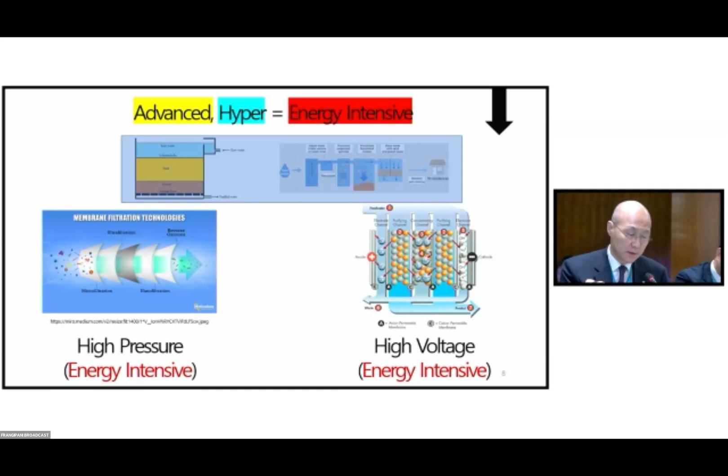I think global boiling affects water quality more than quantity. To produce safe water, energy intensive processes are being needed. In the global boiling era, research on water treatment technologies that use energy efficiently is needed to ensure safe water quality.

We water quality specialized engineers should catch two rabbits: one rabbit is safe water quality, and the other is an energy efficient water treatment process. But it is very difficult to catch the rabbits simultaneously.

However, in other countries, for example Germany, they throw one stone and catch two flies. So it's the same thinking. And one more important thing about water...

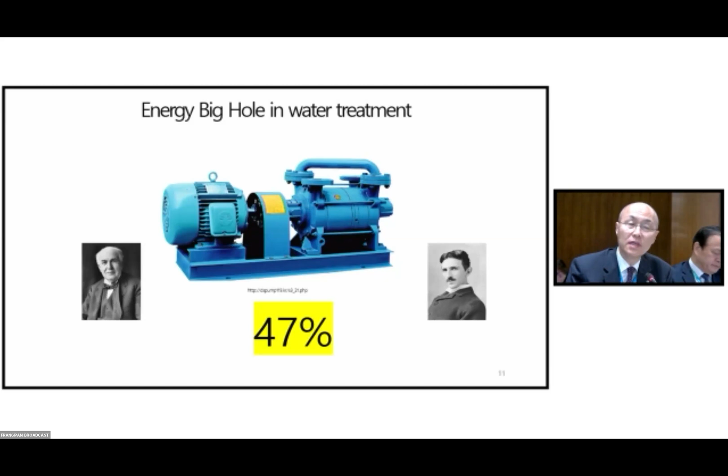This is Nikola, the developer of AC, and he is compared to Edison, who is very famous. Edison developed DC. This is KEPCO in Korea.

KEPCO is the Korean company that manipulates the electric grid, the power grid. In order to reduce global warming, energy production based on fossil fuel decreased. Various technologies of renewable energy production are being developed and used. So the usage percentage of DC increased gradually.

I think in that electricity energy area, we as water treatment specialists should consider how we utilize DC in water and wastewater treatment plants.

Seoul has 6 wastewater treatment plants and 5 water treatment plants. These plants consume 47% of the city's public sector electricity.

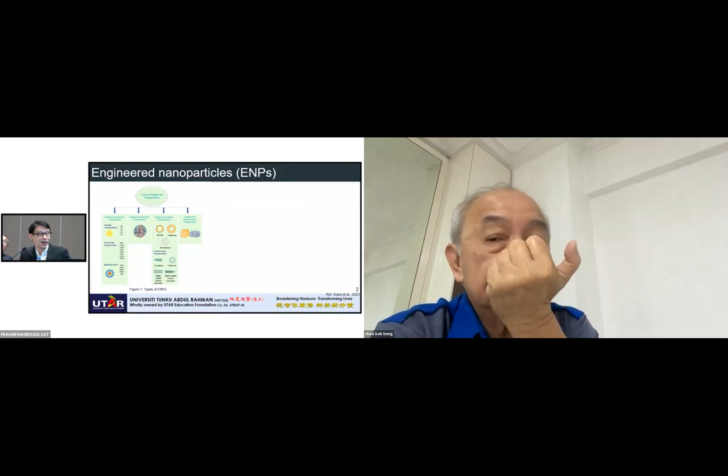I'm just going to briefly introduce a bit of these pollutants. The first one is the engineered nanoparticles.

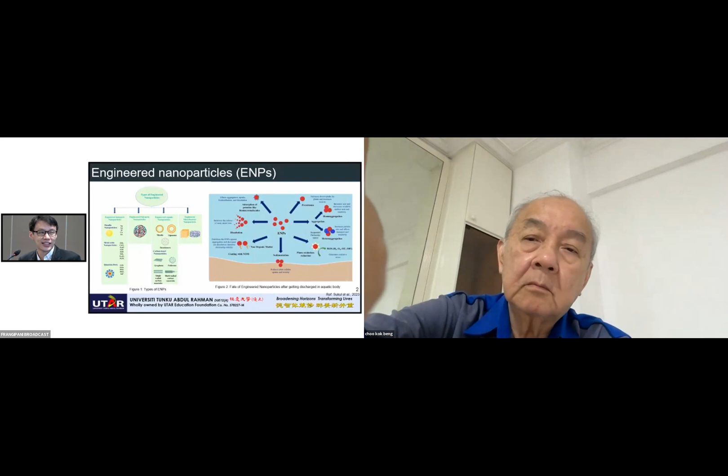As you can see, engineered nanoparticles exist in a lot of different forms. We have popular nanoparticles used nowadays, like graphenes, multi-wall and single-wall carbon nanotubes, fullerenes, and metal oxide nanoparticles. They've been used in many applications due to higher stability, higher electronic conductivity, and better mechanical properties. As time goes on, we believe more applications will use this kind of material, and if not treated properly, they're going to discharge into our water bodies as well.

This can constitute a new type of pollution that we need to be aware of. If you look at these diagrams, you can see that engineered nanoparticles, when entering our aquatic bodies, can produce a lot of different pollutants and create some hazardous issues as well.

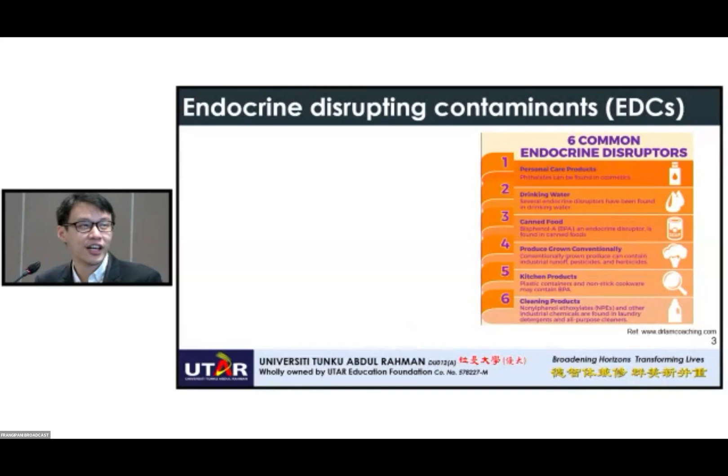The next one is what we call endocrine disrupting contaminants. Again, they can be found almost everywhere in our daily life - from personal care products, drinking water, canned food, cleaning products, etc. They have potential adverse effects even at very low concentrations, and can have delayed effects. The difficulty in detecting this kind of pollutant is that its effect might take years, or even affect multiple generations, due to its effect on body hormones and response. It can cause irreversible health damage, and lack of adequate detection method enforcement is the main issue, where we're unable to detect it properly in our wastewaters.

Then there's also what we call persistent organic pollutants. As its name says, this kind of pollutant is persistent - it can accumulate in our whole ecosystem, bringing toxicity and affecting human health and the environment. Several characteristics of POPs: they possess toxic characteristics, they're persistent in the environment meaning they can exist for a very long time without being degraded due to high stability, and they can bioaccumulate through fish and marine life that consume them, then transfer into our human food chain. Due to its high stability, it's also prone to long-range transboundary atmospheric transport - it can transport from one place to another easily, and potentially cause adverse human health and environmental effects. These are very serious issues.

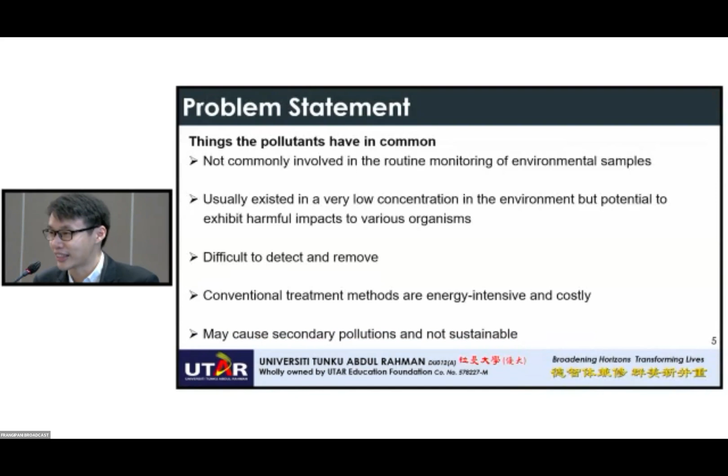But it can still cause great harm to various organisms in our ecosystem, and it's difficult to detect and even remove. Conventional treatment methods work, but they're either energy intensive or very costly. Some treatment methods like advanced oxidation might cause secondary pollution and are not sustainable in the long run. That's why we're touching on phytoremediation, a more sustainable and green technology to remove these pollutants.

Phytoremediation is basically a plant-based approach where we use the natural properties of plants to remove pollutants from contaminated environments, either soil or water. It works with many different types of pollutants, and with emerging contaminants it has been found particularly effective because they exist at low concentrations. It can also limit pollutants from spreading, using plants to hold them in place due to their resistance to wind, rain, and groundwater flows.

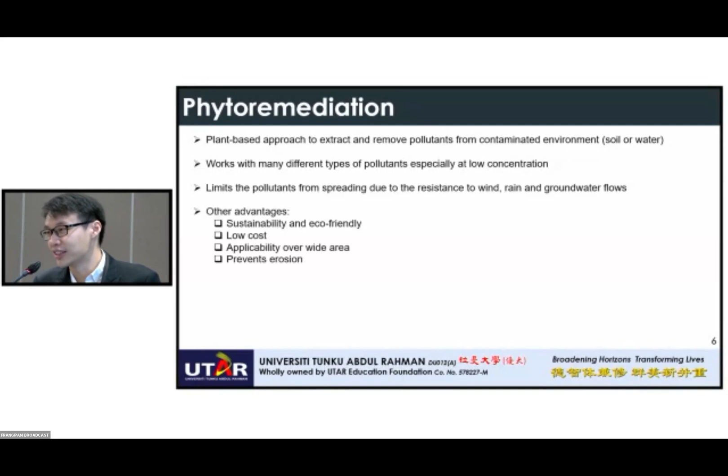It also has other advantages, such as being more sustainable and eco-friendly. It's a plant-based approach where the energy comes basically from sunlight, so it's very renewable and low cost. It can be applied over wide areas, and using plants can help prevent soil erosion and improve soil fertility.

One real example is phytoremediation being used to clean up the Aberdeen Proving Ground in Maryland, USA. This ground was previously used for burning industrial and warfare chemicals from the 1940s to 1970s. But through planting poplar trees at the phytoremediation site, contaminants were reduced by up to 85% without any additional cost.

Just by planting all these plants there, it can help remove the contaminants already, proving again that it's effective over a wide range of areas.

There are different kinds of phytoremediation we need to discuss. First is phytoextraction, where we uptake and recover pollutants into the aerial parts of the plant biomass, meaning the upper part. Then we have phytostabilization, where we immobilize pollutants in soil or water through absorption in plant tissue, mostly at the lower parts of the plant.

Then we have phytodegradation, where certain enzymes from the plant help degrade organic pollutants into non-toxic components. Then phytovolatilization, where we convert pollutants or heavy metals into volatile states where they become less toxic. And then we have phytostimulation.

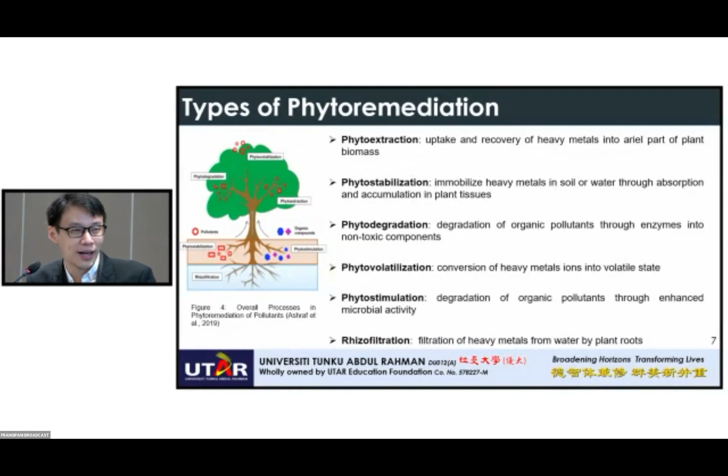On its mechanism, phytoremediation involves a series of processes to accumulate pollutants inside the plant: pollutant mobilization, root uptake, xylem loading, root-to-shoot transport, cellular compartmentalization, and sequestration. First, pollutants are absorbed through the root surface of the plant and moved up into the plant itself.

Upon entering the root cells, pollutants can form complexes and be immobilized in the extracellular or intracellular space of the plant. The metal ions or pollutants are then sequestered inside the vacuoles of the plant cells and transported into different parts of the plant through the xylem streams. Subsequently, they are transported and distributed to the leaves or other parts of the plant, where they can be easily sequestered in the extracellular compartments.

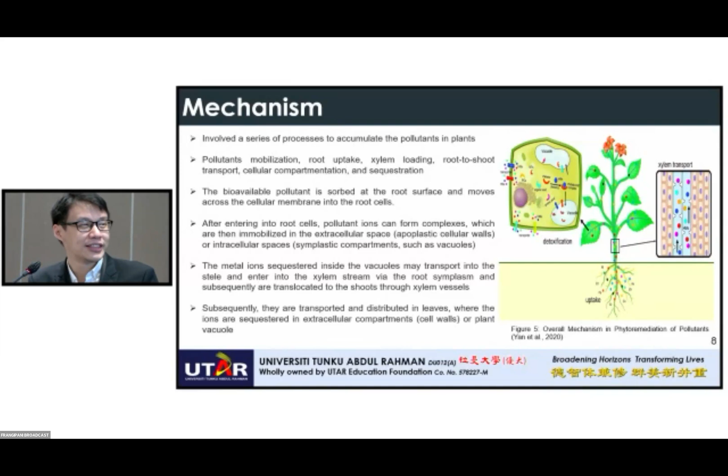So these are the main mechanisms that are happening in phytoremediation. On the current status, phytoremediation has been ongoing research for decades, and currently we have a lot of different countries actively contributing to this field. Publications regarding phytoremediation have been increasing through the years.

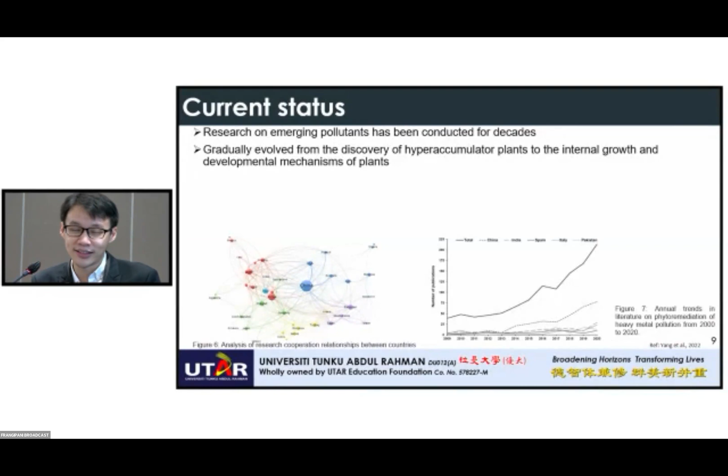We have gradually evolved from the discovery of hyperaccumulator plants, which means plants that can accumulate pollutants very fast and in large amounts, that's why they're called hyperaccumulator plants. From this discovery, we now focus more on the internal growth and development mechanisms to understand better how plants work to extract these pollutants.

We also studied seed germination and seedling growth characteristics so we can better improve phytoremediation studies. We have studies exploring different alternatives to further improve the effects of phytoremediation, involving externally applied electric fields to remove ions, and how we can effectively use microbes in the soil to improve phytoremediation efficiency.

Large-scale application is also being studied continuously through constructed wetlands, where the large-scale process is more feasible and can remove a lot of contaminants.

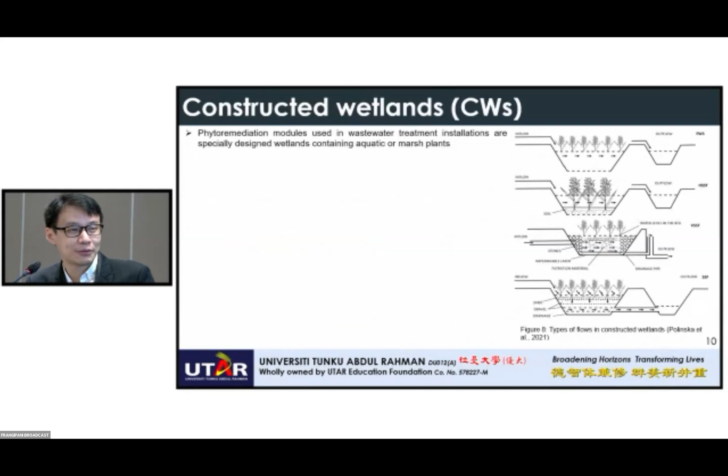On the issue of constructed wetlands, this is more about large-scale phytoremediation applications. Phytoremediation modules used in wastewater treatment installations are specially designed wetlands containing aquatic or marsh plants. There are different types of flows that allow the constructed wetland to work. Generally, constructed wetlands consist of a reservoir, suitable filter materials, and planted vegetation.

The contaminated water can be introduced depending on the different types of flow. As you can see, we have different types of flow - I'm not going to go into details, but each flow has different advantages and disadvantages. At the end of the process, the water is expelled from the constructed wetlands as clean water.

Constructed wetlands basically employ floating aquatic vegetation, or they can also employ a chain of several ponds with a primary stage of mechanical wastewater treatment, so this can coexist with our current conventional wastewater treatment process.

To replicate natural conditions so we can achieve optimal remediation of contaminated water, we can employ a combination of plant species - not necessarily just one or two specific ones, we can have combinations that target a wide range of pollutants together. This can create a synergistic effect within the same system and be more efficient.

As for advantages, it's very cost effective. Once you have these plants ready, you just need to monitor growth and replace if necessary. It doesn't require a lot of maintenance - you can leave the plants to work by themselves, and it has a high ability to remove pollutants.

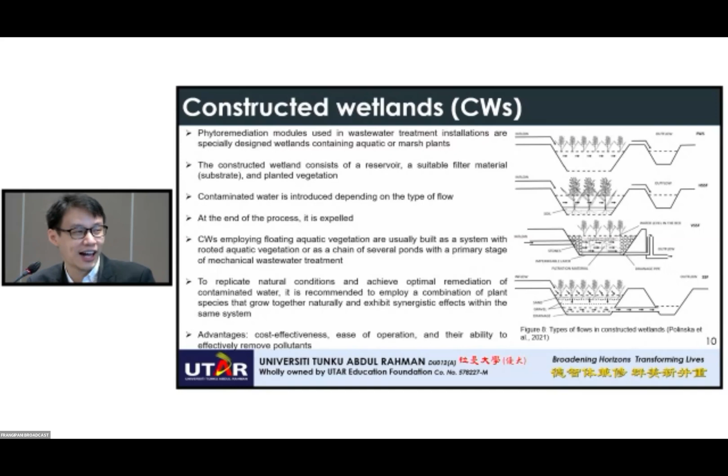Okay, so these are the introduction of phytoremediation. Now a bit of info on my current research on phytoremediation.

This is one of my projects which focuses on removing nickel 2 ions, a popular heavy metal in industrial wastewater. We want to see how we can remove these nickel 2 ions through phytoremediation.

We embarked on this research due to the ineffectiveness of conventional techniques for heavy metal removal methods, and the uptake abilities of various species on these nickel ions is still quite unknown, so we want to explore further.

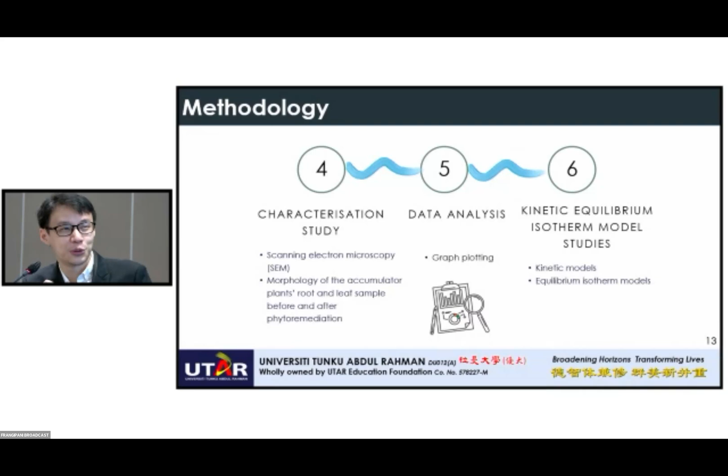We also want to investigate the different potential of accumulator plants that we are targeting, and the uptake abilities of these various floating aquatic plant species towards the removal of nickel ions. The methodology involves plant preparation, preparing synthetic wastewater containing nickel ions, studying different parameters, characterization study, data analysis, and lastly kinetic and isotherm model studies.

Due to lack of time, I'm just showing some of the important results we obtained. We tested 4 different kinds of aquatic floating plants in our studies to remove nickel, and each of these plants contained quite high removal efficiency. For example, Salvinia natans, which is a quite popular floating aquatic plant in Malaysia, can reach about 90% removal efficiency already. Even without comparing to conventional chemical treatment, this is considered quite effective.

So looking at the nickel 2 ions uptake ability from these four different species we discovered, Salvinia natans is basically the most efficient one.

It indicates that it's very suitable for absorbing these nickel ions. We also did some characterizations where, before and after the phytoremediation, we discovered spherical particles attached to the surface of the roots, showing that the nickel ions have been absorbed successfully through the roots. From the leaf, we don't see any significant difference, meaning it doesn't really transport out from the leaf of the plant.

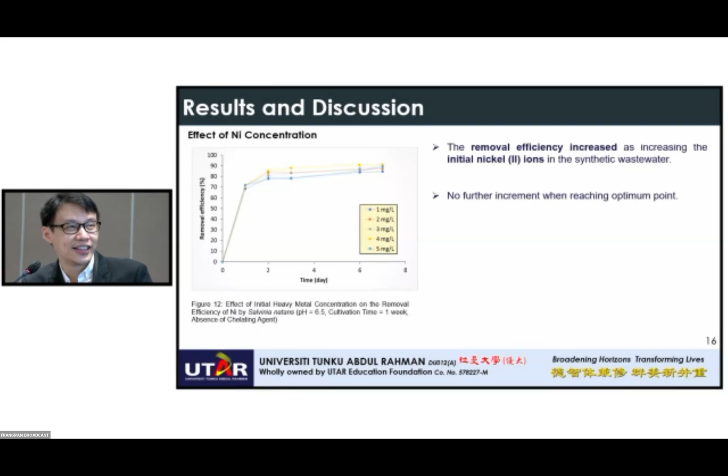On the effect of nickel concentration, we varied the concentrations and found that the best concentration was under 4 milligrams per liter. Higher concentrations will result in poisoning of the plant growth, so this is the limit the plant can take for nickel concentrations. The removal efficiency increased with increasing initial nickel 2 ions, with no further increment once reaching the optimum point of 4 milligrams per liter.

At high nickel levels above 4 milligrams per liter, we found oxidative stress occurs, which affects the membrane permeability of the plants. This results in the transport mechanism being inhibited, causing lower plant uptake.

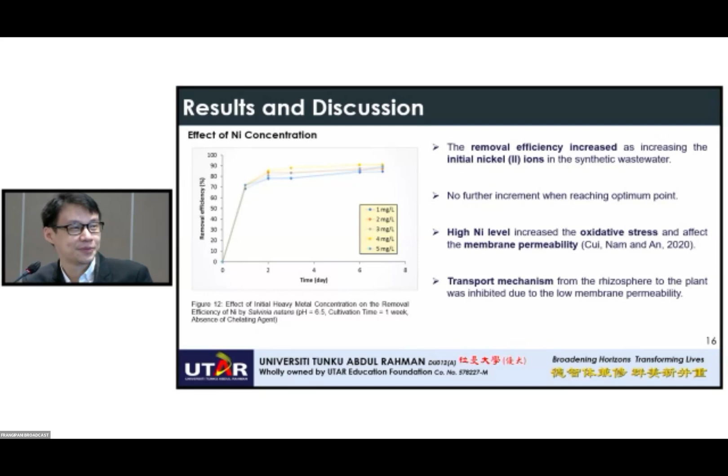We also wanted to investigate the effects of these ions on plant growth itself, since we don't want the plant to be unable to grow after absorbing all these pollutants. We found that Pistia stratiotes and Salvinia natans show negative growth rates. Although Salvinia natans absorbs quite a lot of nickel ions, its growth rate is severely reduced. A negative growth rate means it has a significant impact on the plant's metabolism.

The other two plants have a positive growth rate, meaning they are exotic plant species that can perform phytoremediation more effectively within a short period of time while still being able to grow their plant biomass.

On the quality of treated water, we measured the COD value of the treated water, and it fulfilled the requirements of the Malaysian standards under the industrial effluent discharge standards.

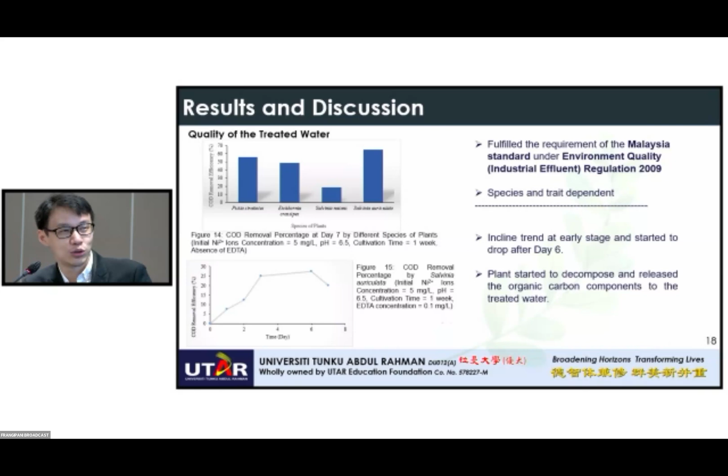Looking at the days of COD removal efficiency, it started to increase due to the phytoremediation of the plant. After day 6, it reduces a bit, which we found is due to the plant starting to decompose and release organic carbon components into the water. So at the same time, we also want to find more stable plants that are harder to decompose, so we can retain the pollutants more inside the plants.

For the potential of phytoremediation in general, it can remove pollutants using plants ranging from a few percent to almost 100%, as with the nickel ions shown earlier. It basically depends on the types of plants used, the structure of compounds, concentration, and also the plant density.

What makes this attractive is that it's a simple process, low cost, and particularly effective for developing countries. But of course it has its drawbacks, being a time-consuming process. If you need the plant to remove a lot of these pollutants from the contaminated site, it takes quite a long time as well.

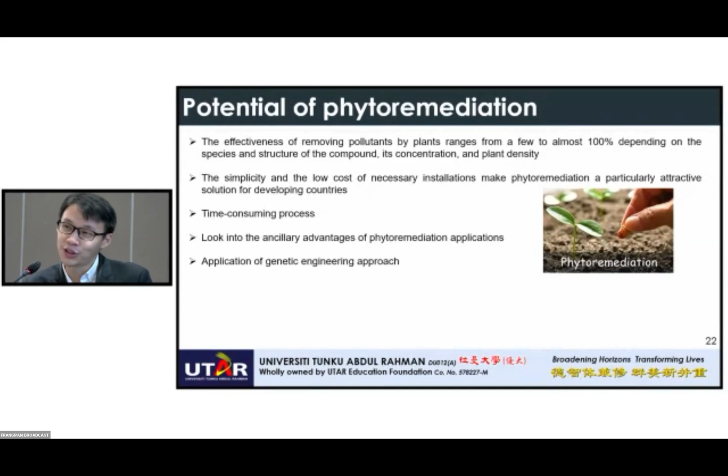Application of genetic engineering approaches is one way to further improve phytoremediation efficiency. Further understanding of the mechanism will be important to fulfill the maximum efficiency of phytoremediation. Also, study of chelating agents and microorganisms can help improve its efficiency. These are basically the future directions our research group will be working on.

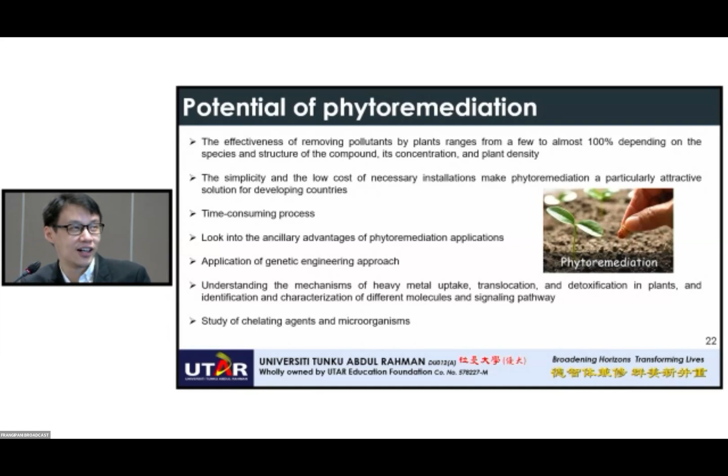Thank you very much, Dr. Stephen Lim, for the interesting topic. It just happened that 20 years ago, I did my master's in constructed wetland, also very similar work—I did landfill leachate treatment. We can chit chat more on that later.

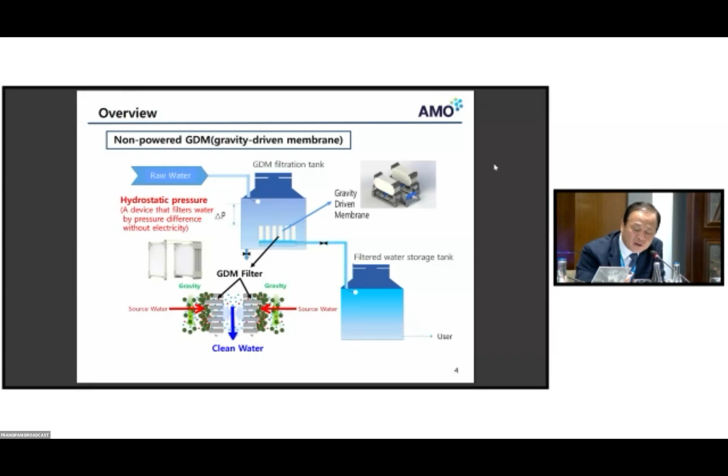So from source water, we can get clean water using the GDM filters. Next, I will introduce more in detail.

Our target can be summarized in three parts. One is the development of electrospun nanomembranes. Second, using these electrospun nanomembranes, we developed membrane filtration systems like the GDM. And in some cases, depending on the source water, we need some kind of pre-treatment or post-treatment. So based on our GDM filtration systems, we can add some systems before or after, depending on the source water.

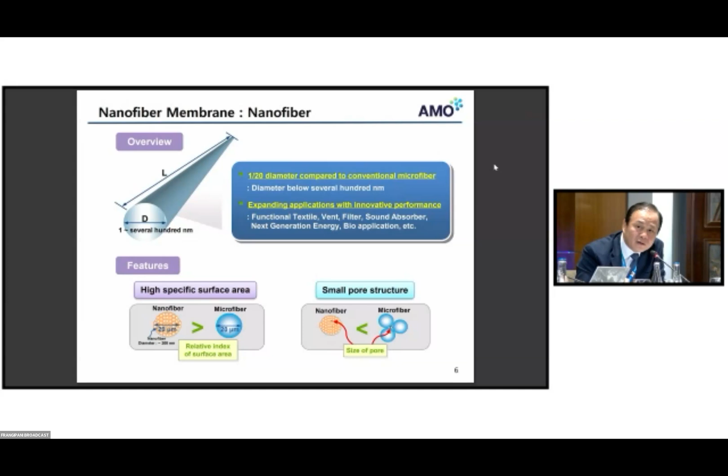Now, nanofibers—usually we say a nanofiber has a diameter below 1 micrometer, typically several hundred nanometers, and long fibers. They show a very high surface area and small pore structure. You can see a human hair has a diameter of 0.1 millimeters; behind it is the white area, and this SEM photograph shows it looks like a net.

So the nanofiber diameter is around several hundred nanometers, and the pore size is up to 1 micrometer—like a net structure. This means that using this kind of nanomembrane, we can filter out contaminants while passing water through the nanofiber membrane. So our idea is like this.

First, we must filter out some kinds of pollutant. In this case we need a very small pore size, but we need more quantity, so we need higher porosity. Using nanofiber membranes, we can filter out very small contaminant particles while also allowing a large amount of water to pass through. The porosity is more than 80% in this case.

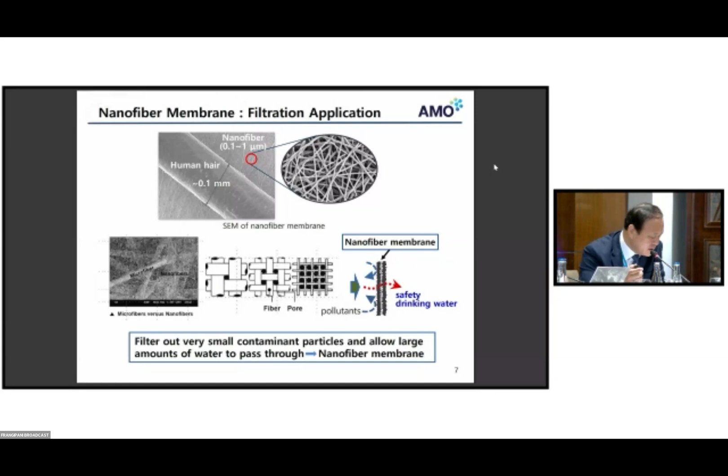You can see the various kinds of nanofiber membranes using various kinds of manufacturing systems. This is the nanofiber membrane made by the electrospinning process, optimized for GDM water treatment. GDM means that without electricity, you can purify some kinds of water.

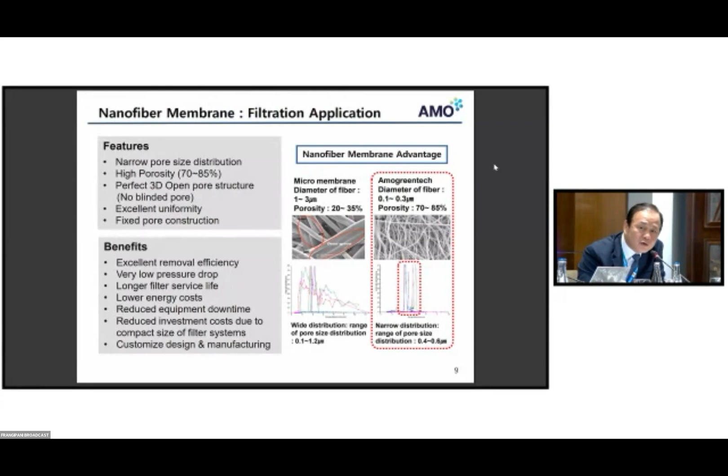Using nanofiber membranes has many benefits, such as narrow pore size distribution, and porosity generally more than 80%. Next I will show you the excellent ability to easily remove some kinds of bacteria or viruses. In these figures you can see the very narrow, uniform distribution of pore size.

I already mentioned the electrospinning process. Electrospinning applies high voltage to liquid polymer solutions, and then we get a fine jet from the needle of a syringe pump or something similar.

Our company started this kind of R&D around 20 years ago.

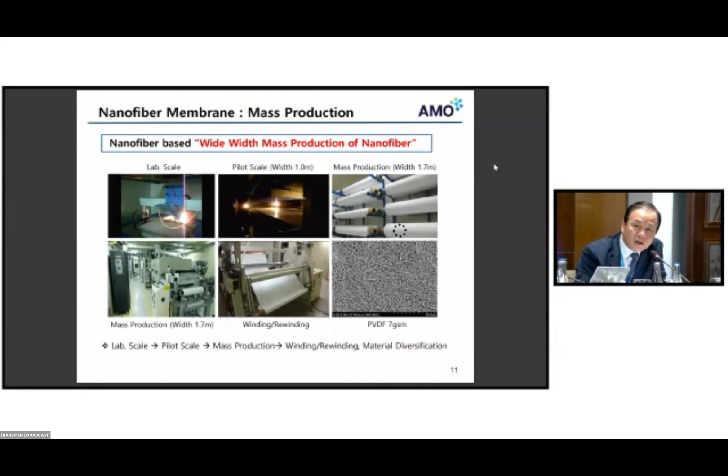We set up a pilot scale line, with a width of 1.0 meters, and we can produce the nanofiber membranes. This is the final product, like this.

To make nanofiber membranes, first we must select what kind of material is best for GDM filters. So we tested several kinds of materials like PVDF, PAN, and in some cases PE.

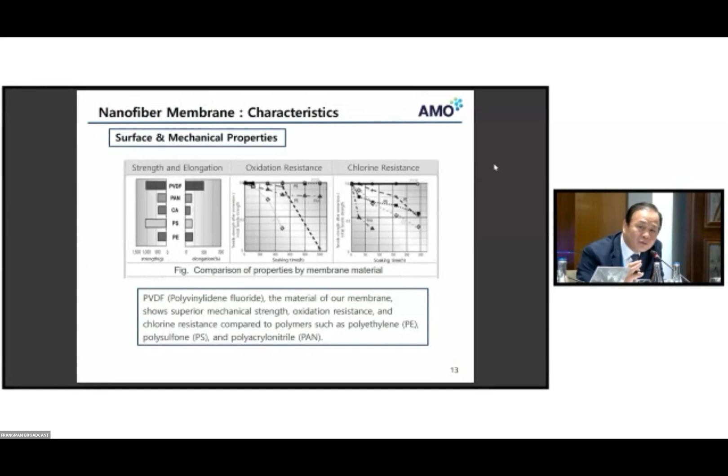We examined the structure's tensile strength and elongation. In this slide you can see PVDF and PAN show better properties compared to porous film structures, comparing strength, elongation, oxidation resistance, and chlorine resistance, since raw water contains chlorine and other materials. We can say PVDF shows better properties compared to PAN, PE, and other materials, so we selected PVDF to make our nanofiber membranes.

To test our nanofiber membranes, we worked together with Nanyang University in Singapore. We tested there, and you can see the porosity is recorded at more than 80%.

Most important is the amount, the flow rate. The flow rate is much higher than existing membranes, 6.6 times higher, and you can see other data here as well.

Our target is to optimize the nanofiber membranes, so we had to find and generate a lot of data for manufacturing and maintenance. We tested depending on pore size and depending on the thickness of the nanofiber membranes. We mainly tested two points: the flow rate, and the removal ability of bacteria or virus.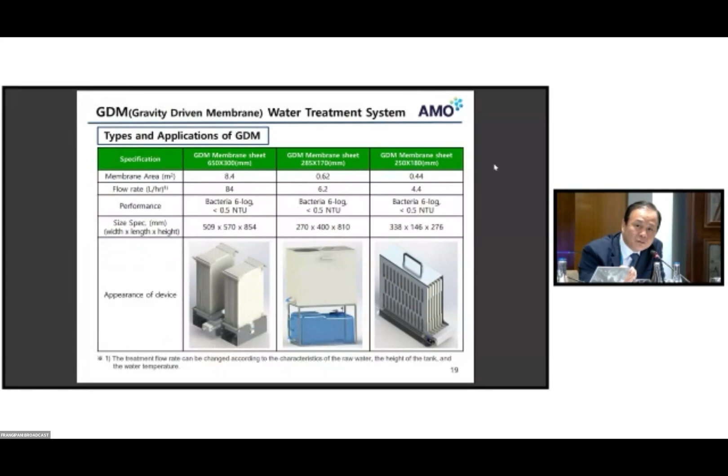As a result, basically the standard model is like this. The flow rate is around 4.4 to 84 liters per hour. It's bigger, like this.

So we test using our systems. We tested the filtration capacity, around 6 months without cleaning. We found more than 3 times higher filtration capacity compared to existing nanofiber membranes and other existing purifying systems.

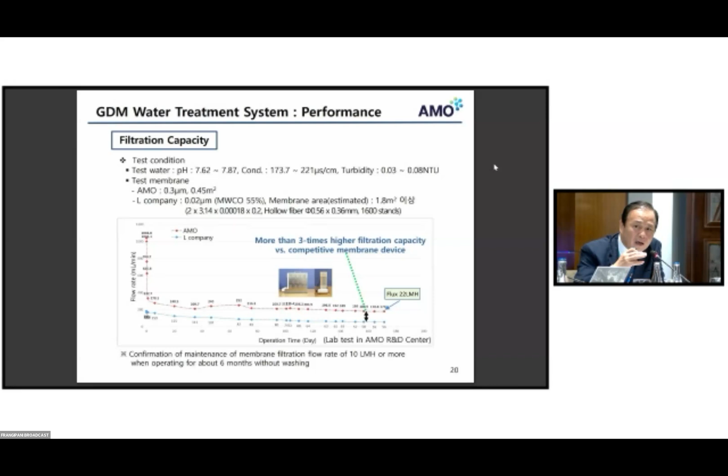Also, maintenance and repair is very important for commercialization. That's why, since there are not many experts and such, we must find a way to clean and repair very easily. So we want to make some kind of standard for cleaning and repair.

So we tested many kinds of cleaning systems, like physical cleaning. Physical cleaning means only by air, and some physical cleaning systems depend on methods like this. As a result, we found a good cleaning effect just by simply washing the surface with high pressure water, and in some cases air. So in this case, you can see here.

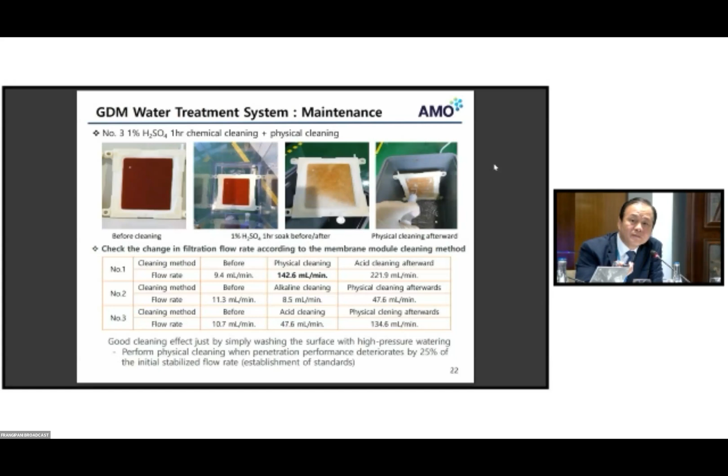Also in the case of high turbidity water, like after rain, we found similar properties, and using very simple physical cleaning, we can find recovery by physical washing of more than 95%.

In some cases, depending on the low-quality water, we must customize our process, mainly for water including heavy metals like arsenic. This is the existing way to purify the water.

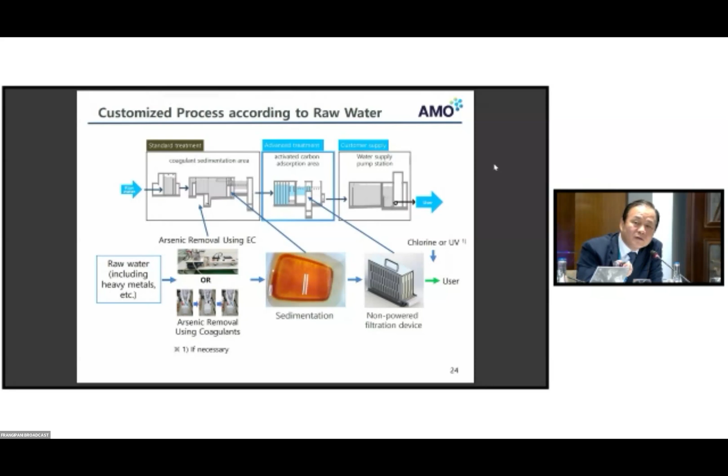So in the case of arsenic, we can add processes like electrocoagulation systems, and in some cases using coagulants. Then based on our systems, we can purify the water.

We checked the coagulants and the electrocoagulation. Using a coagulant like aluminum salt or iron salt, we found results like this. After using this kind of coagulant, we could see recovery of the water purification systems.

We also checked arsenic removal using coagulants like iron salt or aluminum salt, depending on the content of iron salt. We found removal of arsenic and other metal components, and depending on the voltage amount, we saw the same phenomena. Usually the efficiency with EC is more effective, meaning you can very easily remove the arsenic.

Finally, I would like to talk about the field verification in Korea and overseas. Generally, our field verification is done together with Korea Water, which is the government organization dealing with water and wastewater treatment.

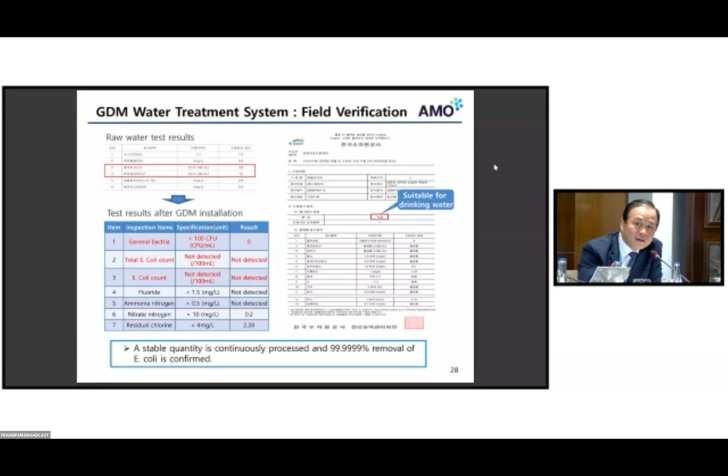The second test site is near Seoul, in Gyeonggi-do area. We made a GDM unit, produced and installed it, and finally installed a real-time water quality monitoring system.

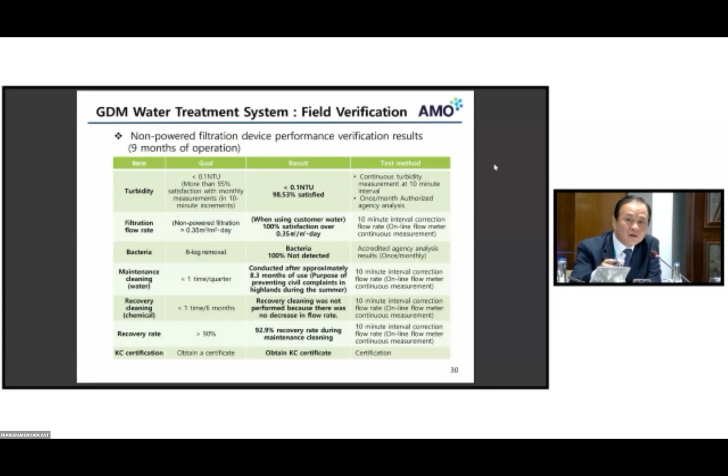We checked more than 7 items, including turbidity and filtration flow rate. We found turbidity was very low, filtration was high, and bacteria were around 100% not detected, like this.

Also for overseas testing, we made 2 kinds of systems. One is a small system, around more than 30 liters per day, and the large system is more than 100 liters per day. We prepared these 2 kinds of systems and tested overseas in Indonesia, in North Sumatra, Pekanbaru.

Do you know? Maybe Pekanbaru. Yeah, North Sumatra, so we tested in this area.

We tested the small system and large system there. As I mentioned, 2 points: flow rate and removal of bacteria. We found we couldn't distinguish much, but anyway we confirmed removal of bacteria, and the flow rate was above our target.

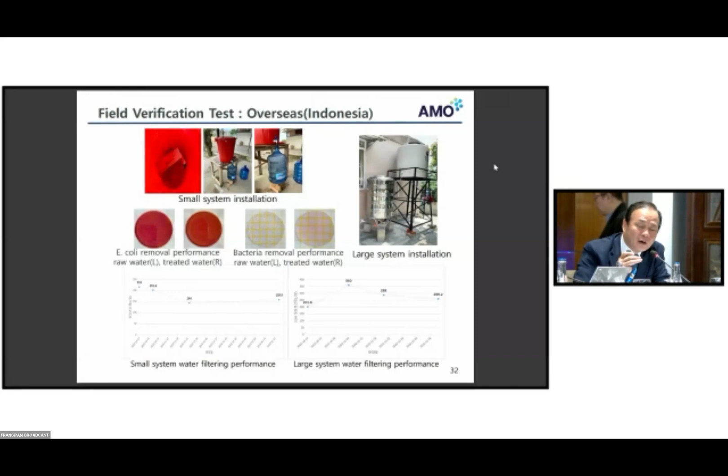Also in Uganda, Myanmar, and Tanzania, we tested our small systems, checking removal of bacteria and flow rate. In every case, we gathered satisfactory data from that area.

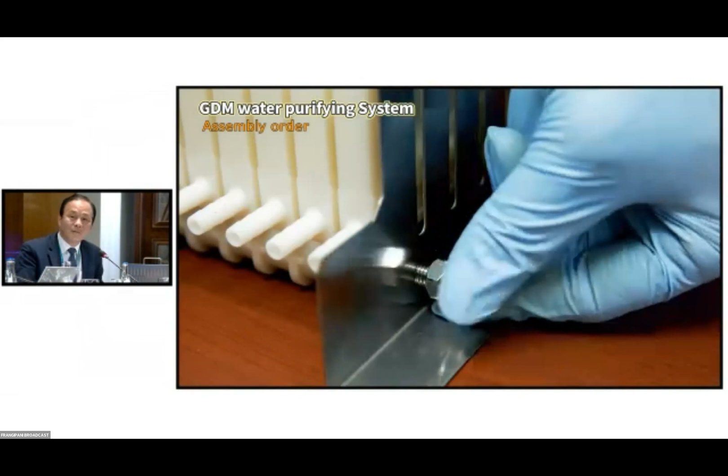Yeah, this is real water, very true. As I mentioned, it's around 4 to 5 liters per hour for the small systems. I also prepared some brochures, so please use them.

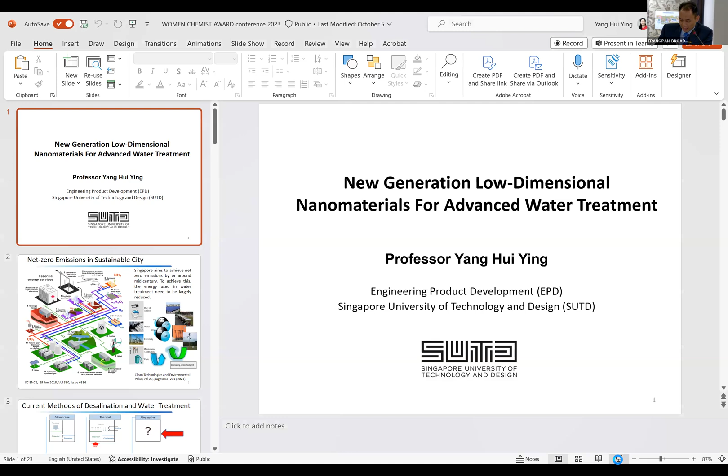Thank you, Chairman, and thank you to the colleagues. It's my great honor to be here today to present my research related to low-dimensional nanomaterials and their applications for energy and water. As we all know, net zero emission is a very important topic, referring to the use of renewable energy and reducing carbon dioxide emissions from every sector in industry. Singapore aims to achieve net zero emission by or around mid-century. To achieve this, the energy used in water treatment needs to be largely reduced.

So let's review a little bit the current energy being utilized for desalination and water treatment. There are a few groups of technologies used for low or high energy concentration water treatment. The first group is membrane technology, including reverse osmosis, electrodialysis, and so on. These membranes are actually very expensive due to the huge energy and infrastructure cost.

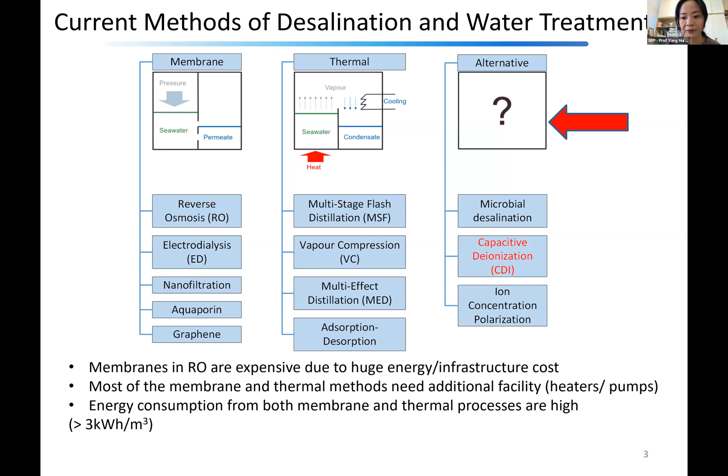Then there are promising alternative technologies for water desalination or treatment. In this group we have microbial desalination, capacitive deionization, and ion concentration polarization, among others. These low energy consumption water treatment technologies aim to reduce the energy consumption in water treatment to below 3 kilowatt-hours per cubic meter. Our group is actually working on low energy water treatment and desalination technologies.

Today I will present some research work on capacitive deionization. Capacitive deionization is a very simple process. It refers to using two electrodes, one positively charged and the other negatively charged. A very small direct voltage or current is used to charge the electrodes, and oppositely charged ions are absorbed onto the electrode surface due to physical attachment. The electrodes are regenerable by a short circuit motion or reverse voltage current.

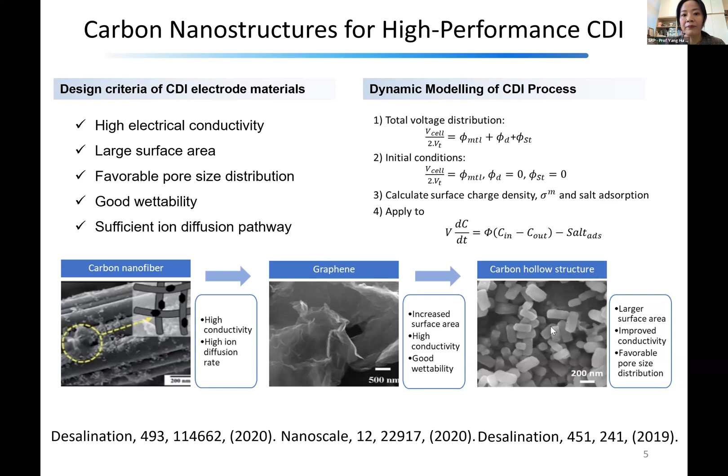However, even with these highly efficient materials for capacitive deionization, we can barely achieve around 10 to 20 milligrams per gram absorption capacity for CDI devices. The reason is that we have this very limited capacity based only on physical attachment of certain positive or negative charges on the surface of the electrode.

If you want to further improve this efficiency, you need to prevent cations from being absorbed by the anion electrode when you have a large amount of anions being attracted on the surface, which is called the co-ion expulsion effect. To reduce this effect effectively, we need to enhance the salt absorption capacity, improve energy efficiency, and achieve better performance for the electrode.

What we have done is implement an ion exchange membrane in front of the electrode to prevent this co-ion expulsion effect. You can see here we implemented an anion exchange membrane before this porous carbon electrode on the cathode or anode. After implementing this anion or cation exchange membrane, we can see our efficiency has been greatly improved for this membrane-based CDI device.

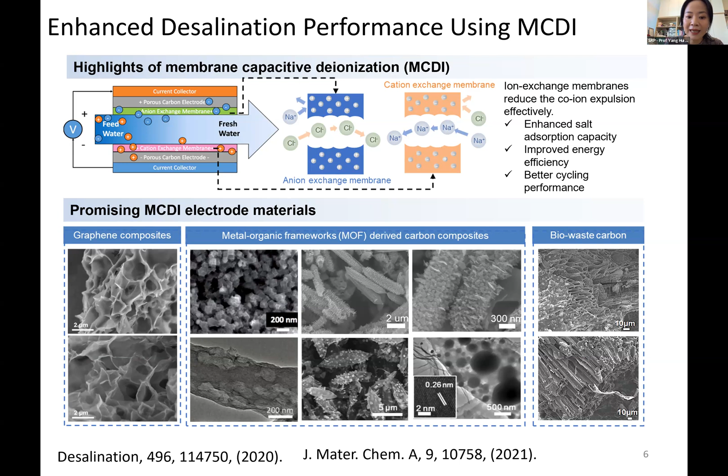After that, we were able to move the salt removal capacity from around 10 to 30-40 milligrams per gram. But again, this is still a very minimal level of salt removal capacity. To improve it further, we need to fundamentally change the absorption mechanism from purely physical attachment of ions to the electrode to some sort of chemical-based reaction or absorption.

So what we've done is design a new desalination approach based on a hybrid asymmetric CDI design. For the carbon-based materials, we can choose activated carbon, CNT, or graphene oxide-based material. The limitation of such carbon-based materials is low removal capacity. For the hybrid asymmetric CDI system, we have an intercalation electrode for sodium ions, and the absorption carbon material handles chloride removal while the intercalation electrode handles sodium removal.

Based on this, we have a capacitive material with suitable intercalation layers, for example MXene nanosheet material - sodium-based metal oxide with intercalation channels, and so on. With this, we can enhance ion removal capacity through optimized CDI system design, low-cost energy-saving processes, synergetic effects for counter ions on the oppositely charged electrode, and effective ion swapping at the electrode interface due to counter ion insertion and co-ion discharging processes. This largely improves salt removal capacity.

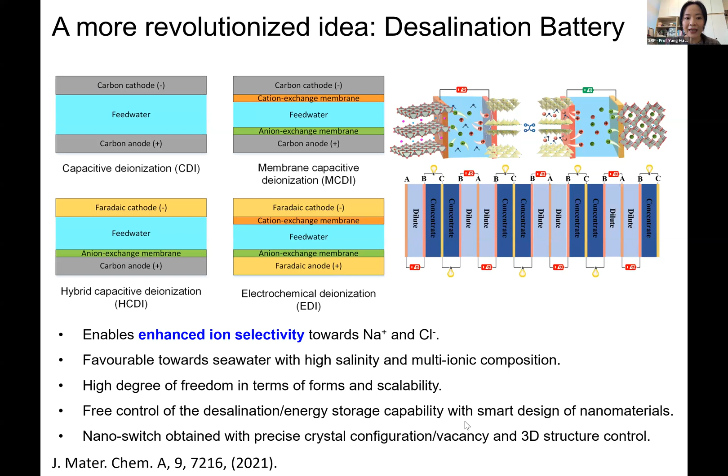With this, we designed our mechanism, called a desalination battery. The original purpose of this desalination battery is to desalinate seawater through an electrochemical process. But when we have electrochemical reactions at both anode and cathode, we realize we can actually release ions when we want to start the process. In this releasing process, we release the ions and also release charge - and this is actually a battery function.

We name this process or device a desalination battery. With a desalination battery, we can remove sodium and chloride with a capacity more than 100 milligrams per gram, have an energy recovery rate more than 30%, and a minimum energy consumption of 0.12 watt-hour per gram, with energy consumption or recovery controllable by applied voltage.

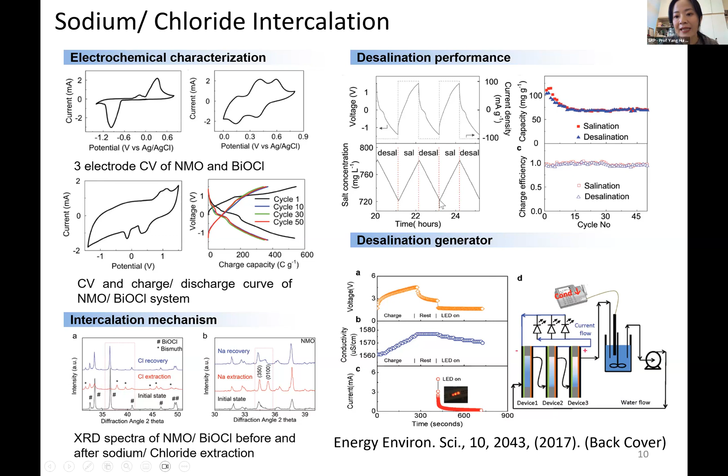Both sodium and chloride have this intercalation reaction with the electrode. For sodium, you can use an NMO-based material, and for chloride, a bismuth oxychloride-based material. With this, you can realize desalination by removing sodium and chloride, and also generate electricity or release those ions when you discharge this desalination battery or desalination generator.

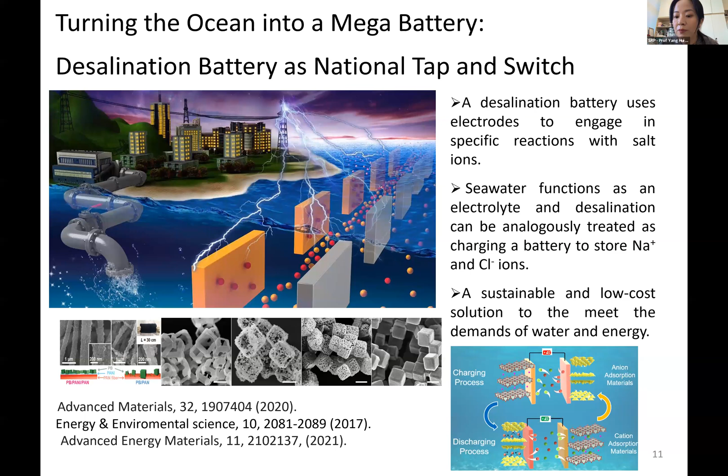Our future goal is to realize a desalination battery that uses electrodes to engage in specific reactions with sodium and chloride. Seawater functions as an electrolyte, and desalination can be analogically treated as charging a battery to store sodium and chloride ions, providing a sustainable and low-cost solution to meet society's needs for both water and energy.

We can utilize the same principle to remove other ions from seawater, not only sodium and chloride, but also lithium. Lithium can be extracted by a fluidic electrochemical system based on this seawater desalination device. Lithium is very expensive, and seawater contains more than 5,000 times as much lithium as land supplies. The current limitation is that lithium concentration is too low, less than 0.17 ppm.

So we design a 3-chamber system with 2 steps. First, we insert lithium into this manganese oxide electrode material. Second, we oxidize the manganese oxide with lithium back to manganese oxide. After that, we release the lithium and reduce the oxygen to form lithium hydroxide.

The lithium hydroxide is the material we eventually utilize in the production and generation of lithium-ion batteries. We can see that the delta G towards different materials is very different, and with this lambda manganese oxide, the delta G is highest for lithium ion, showing the material has very high lithium selectivity.

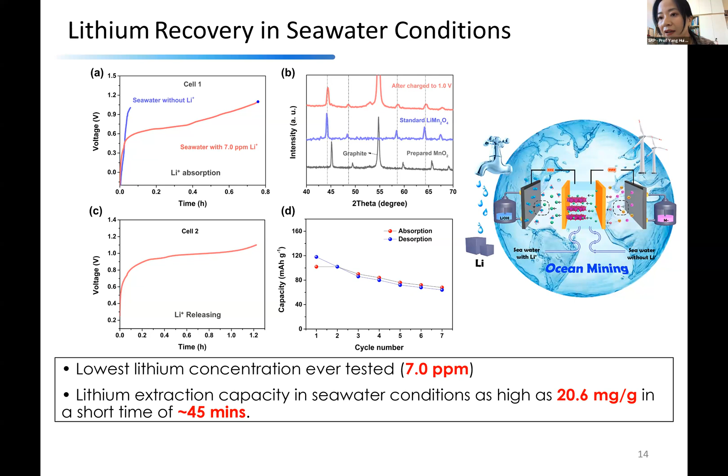We're also targeting other ions beyond lithium. For example, we can have sodium or potassium and other ions selected and inserted into different electrode materials.

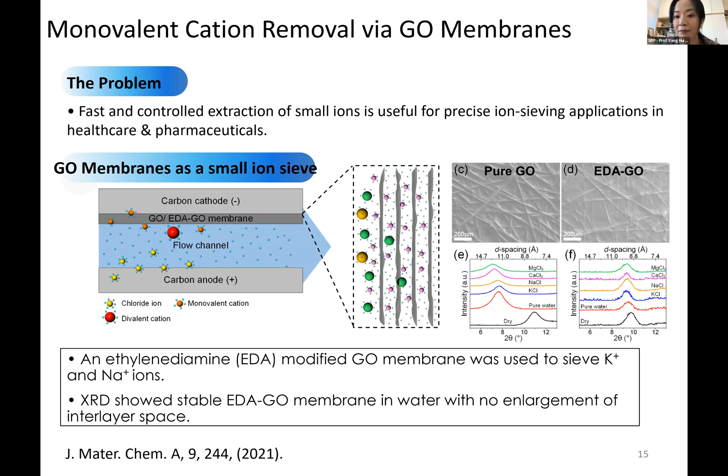We have a monovalent cation removal or collection precise using this graphene oxide membrane. Within this membrane, we can target monovalent ions versus divalent ions, achieving sieving precise targeting potassium ions and sodium ions, with monovalent versus divalent cation removal precise being very different.

Monovalents can only be removed by this EDA-GO graphene oxide electrode. The selectivity for potassium is as high as 4.2 versus magnesium, and the selectivity for sodium can be as high as 3.4 times when mixing magnesium together with sodium ions.

We also remove boron from seawater using nitrogen-doped graphene oxide. WHO recommends 2.4 milligrams per liter boron concentration for drinking water, while Singapore has a 0% requirement for boron in drinking water. Seawater contains boron at more than 4.5 milligrams per liter, and since boron is very, very small, it's very hard for normal membranes to totally remove it.

What we found is boron exists in seawater in the form of boric acid. This boric acid natively has a negative charge, while the nitrogen-doped graphene oxide has a positive charge. When the nitrogen-doped graphene oxide meets the boric acid, the positive and negative charges attract each other, and a water molecule is released when the two OH groups meet.

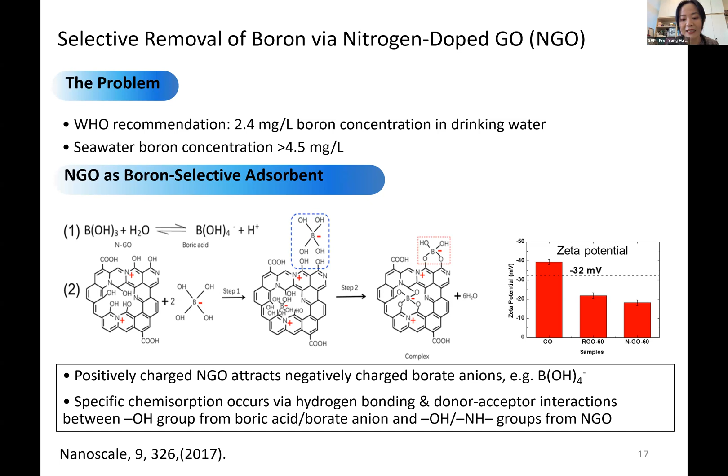From there, a permanent chemical bond forms between the boric acid and the nitrogen-doped graphene oxide. Specific chemisorption occurs through hydrogen bonding and donor-acceptor interactions between the OH group of boric acid or borate anion and the OH/NH groups from NGO.

A total of 9 possible complexes were identified, with nitrogen doped in different locations on the graphene. We found that the highest chemical bonding energy occurs between one quaternary nitrogen atom and two adjacent hydroxyl groups in this combination for the nanocomposite.

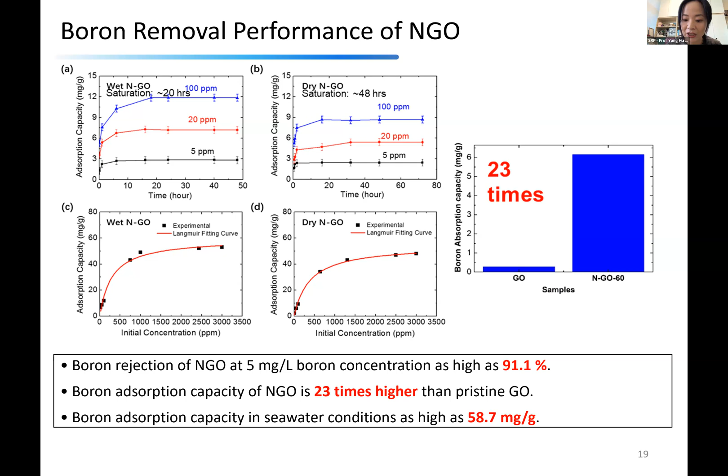Boron concentration reduction can be as high as 91%. The boron adsorption capacity for NGO is 23 times higher than pure pristine GO, and in seawater conditions the boron adsorption capacity can be as high as 58.7 milligrams per gram.

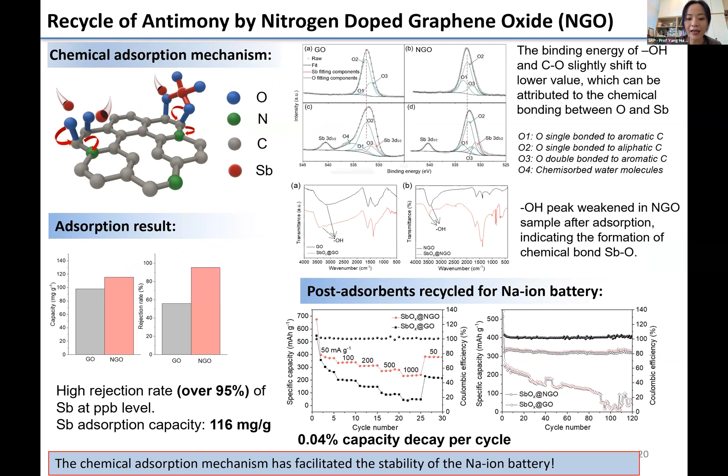We can also utilize NGO for recycling other heavy metals like antimony. We have been working on using NGO to remove antimony, then reusing that antimony for sodium ion batteries, so we can collect the antimony and reuse it for energy storage purposes. The rejection rate for antimony recovery can be more than 95%.

For applications of our ion-selective or ion-removal system, in the future we can utilize these systems in pharmaceutical applications, wastewater processing, precious metal recovery, agriculture, drug delivery, and so on.

I believe there is a bright future for such technologies across many industry sectors, and our research will contribute significantly to net zero emissions and low energy utilization for water treatment and desalination.

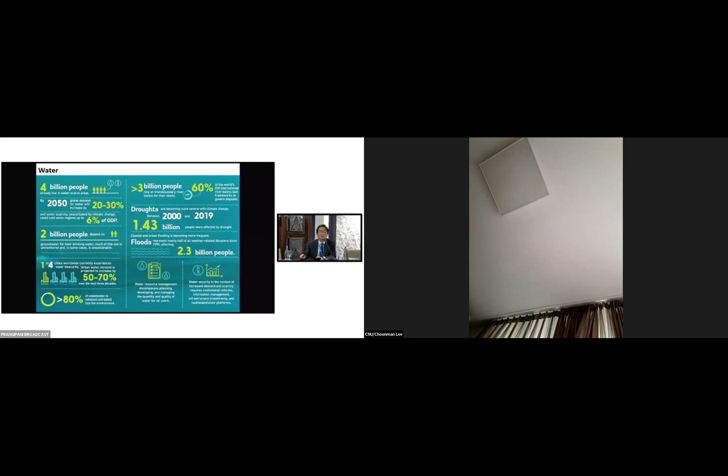Some of this information was briefly shown by Dr. Lee this morning. Water is a problem and becomes a different problem than before. As you can see here, 4 billion people need more water, and more than 3 billion people rely on transboundary water—they get water from outside where they live. 2 billion people depend on groundwater. Droughts and floods affect this many people. These numbers are much more than what we used to see. We also have traditional problems: more than 80% of wastewater is not treated before being released into the environment.

Some of these problems were due to climate change. So all over the world, Korea as well, we are trying to transition water resource management to respond to global change. Water scarcity is shown in many different parts of the world—Korea is one of them. And we are seeing more water disasters, so we are trying to cope with these disasters.

So water resource management strategy is new. We need to go for new directions. First, we have to secure new water reserves—we need more water, we need to find where to get the water. We need to enhance the efficiency of existing water resource facilities.

Water resource facilities—water intake, water treatment, wastewater treatment—are big facilities, and it's not easy to modify them. Once we have it, we'll have it for 30 or 40 years, but the problems are more recent. So we need to find a way to enhance the efficiency of these existing water resource facilities.

And also we need to do the digital transformation, which was well introduced by Dr. Lee this morning. So these are the new directions in water resource management.

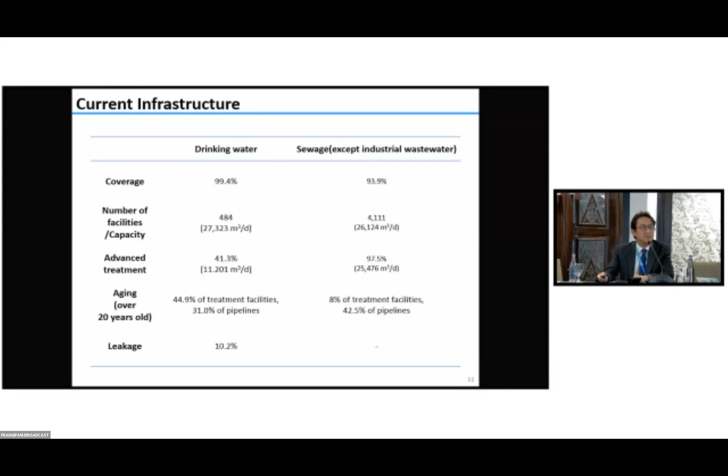We are facing the new problem, which is securing the water demand. Also, the old facilities should be revamped, redesigned, and invested in.

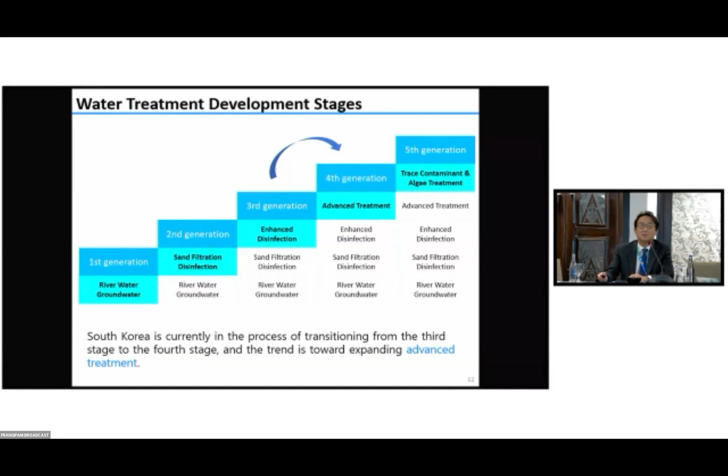If you look at the Korean water treatment development stages, we think we are around this stage—third or fourth generation. We went over sand filtration, disinfection, river water and groundwater use. We accomplished enhanced disinfection in some parts. In some parts we did advanced treatment, but we are still around this stage. Hopefully we can move on to trace contaminant and algae treatment, which we haven't reached yet. In terms of water treatment, this is where we are.

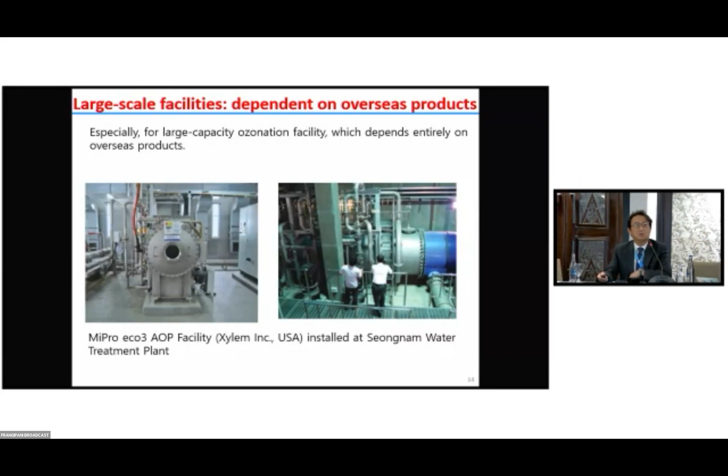But still, another problem we have—current status, large-scale facilities, when we revamp our original facilities, we still depend on overseas products. Worldwide, big name players for ozone or membrane produce very large facilities and have better experience, so in a way they have a competitive edge. In order to overcome that, we need to do some more work.

So as you saw in the status of water and wastewater treatment in Korea, advanced treatment is a common word now. That's something we have to work on.

Globally, advanced treatment—if you look at the market and the players—they see the market will grow. Market will grow by 2027, reaching 3.55 billion USD. Driving factors are market driven by increasingly stringent regulation all over the world. The regulations become tougher and tougher. In order to treat those contaminants, we need something strong. That's why they rely on these technologies.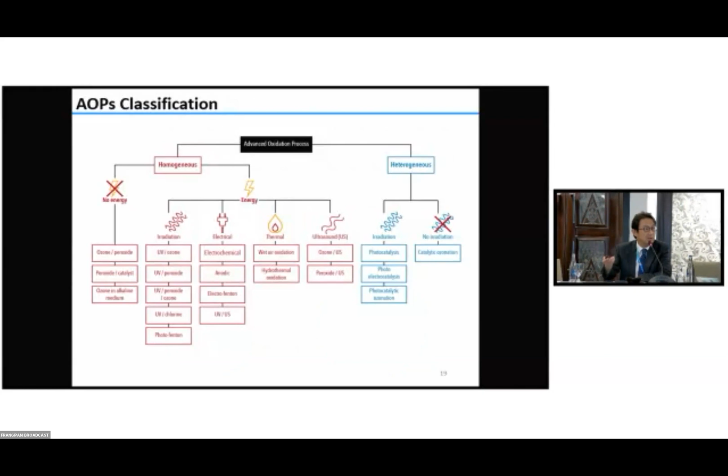AOP different methods, whether homogeneous or heterogeneous, there are various methods. These need to be more developed and more worked on. When we had seminars a couple of times this year, I saw Professor Lim and Professor Yang do excellent research in this field. This is something we can work on together later on.

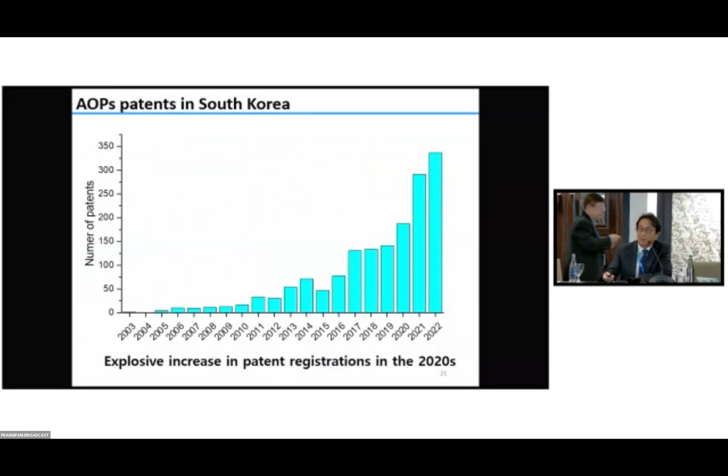If you look at the AOP patents in South Korea from early 2000 to last year, the number of patents has increased dramatically, meaning it's not only myself—everybody sees AOP as the new trend and where we should thrive.

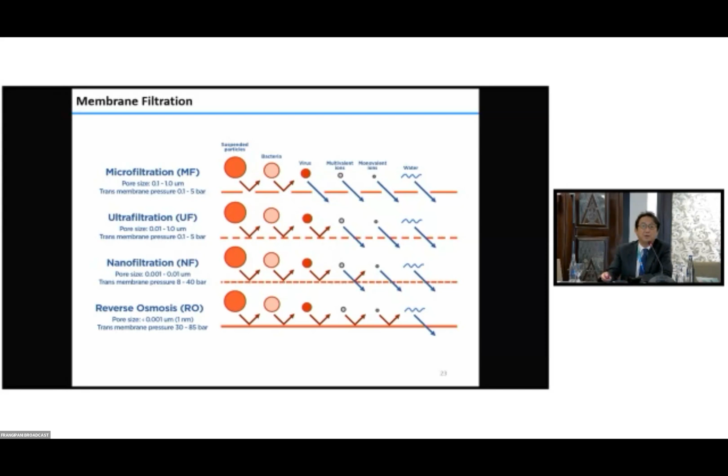Another new trend we should emphasize is membrane. We saw Dr. Song and Professor Yang give excellent presentations on membrane filtration. Whether it's MF, UF, NF, or RO, all of these are widely used. Commercial large-scale membrane filtration systems are led by big players such as GE from the US, Siemens and Norit from Germany, and Asahi Kasei from Japan.

But the market size for precision filtration membranes will be gradually expanding, so there will be some chances other than these major players. Membrane filtration market forecast to 2025 or 2028 will increase.

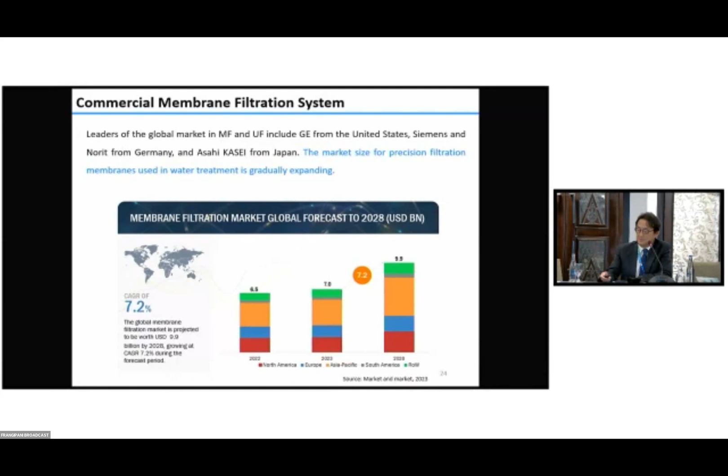In Korea, in response to the current situation, we are trying to develop different membranes, maybe smaller scale, as Dr. Song showed us, or specific applications of membranes are being researched. For example, high concentration wastewater treatment, high permeability and high strength hollow fiber membranes, low energy non-polluting precision filtration, and next generation separation membranes and modules for drinking water. These are areas where we want more results and more products from the Korean side.

So based on this, what can we do together? I believe three parts. The first part is treatment facilities, conventional treatment facilities. In Korea, we need to design and revamp, and rebuild these facilities. In engineering design and construction, we can share our experiences.

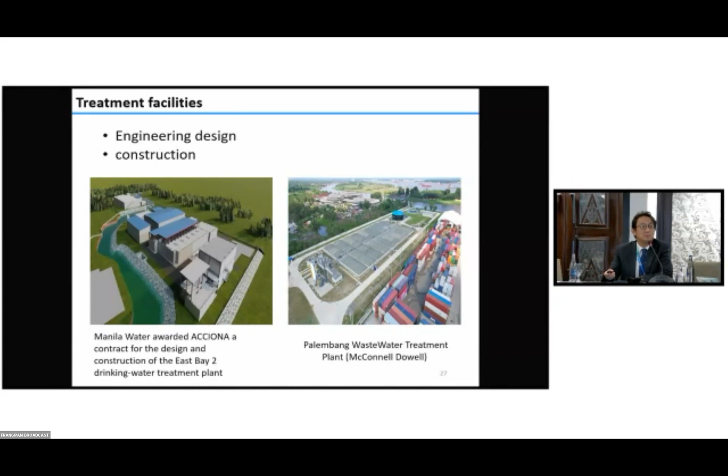As I told you, we have market in Korea. And here in ASEAN, I found Manila, and Indonesia treatment facilities, they worked with a Spanish company and an Australian company. So we can work together to do a better job for these kind of facilities. This kind of work should be more industry to industry, I think. Maybe NAEK and AAET can do some work to promote this kind of exchange and co-work.

Another part we can work together is new water industry sectors. As we define the new water industry, these fields are energy, desalination, water reuse, river management, groundwater parts, which I think we can work together. In some parts, I'm sure ASEAN has more experience than Korea. In some parts, we may have more experience than ASEAN. I think we can do some research in this field, between researchers and researchers, or researchers to industry. We can do some collaborations.

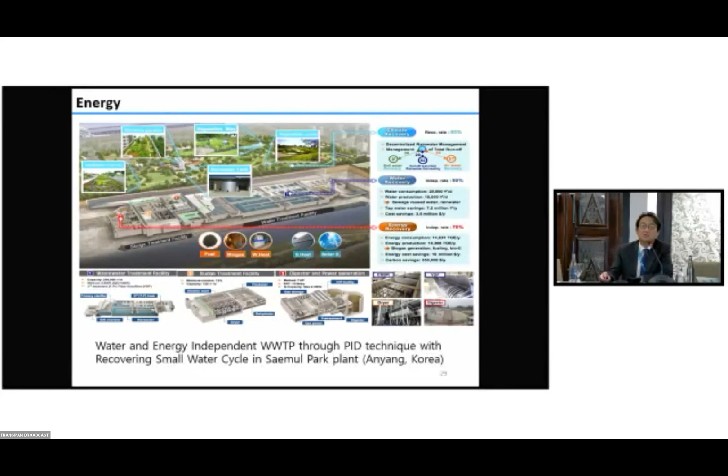For energy, water and energy independent wastewater treatment through PID technique with recovering small water cycle, which is in Anyang, near Seoul in Korea. We have some experience like this, and we can share this kind of information.

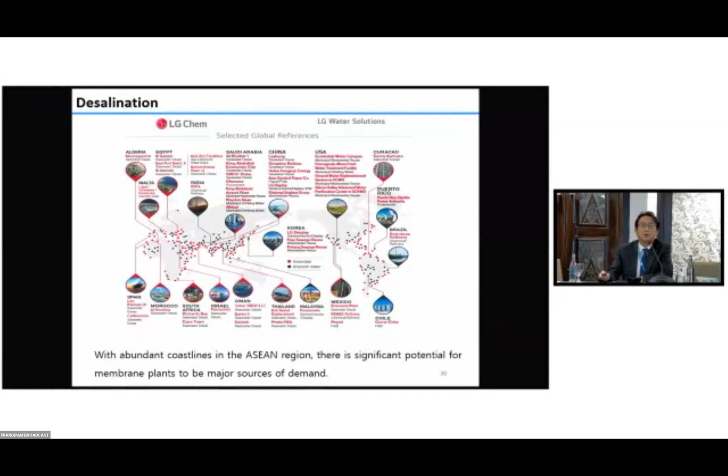Desalination is needed all over the world, wherever the water is needed and where seawater or brackish water is nearby. With abundant coastlines in the ASEAN region, there is significant potential for membrane plants to be the major source of the demand. Maybe you are okay now, but later on, when you need more water, membranes can be a very good option. And water reuse, a global water recycle and reuse market will also grow.

And lastly, new advanced treatment. This is a worldwide trend, not only Korea, and I'm sure it's needed in ASEAN, and we can develop some new technology and go for the larger market as well. For example, AOP, membrane, new advanced treatment development.

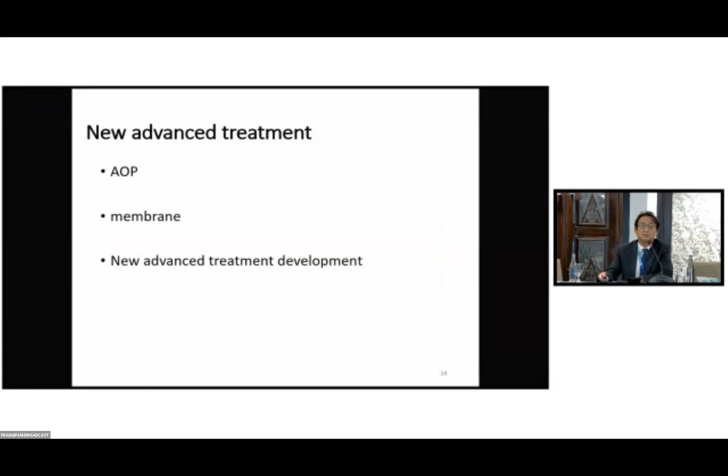AOP, there are some AOP that can be used for conventional treatment. I myself had experience. We developed a stainless steel plate, and anodized the surface, and formed a nanotube, which is actually an effective photocatalyst. We built them, and did the pilot test in China and in Korea as well. I'm sure Professor Lim and Professor Yang, your results can be tested together, and we want to see further development in this kind of field.

And membrane is, of course, we can do some more for the development. Overall, top 10 water treatment trends in 2023, they said more startups are appearing in this field. So these fields are not new, these are the fields I just talked about. Actually, this means that we are on the right track.

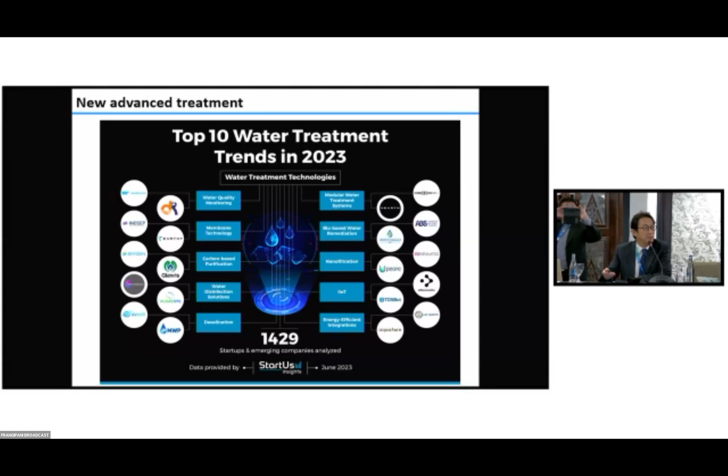So these can solve our problem as well as some problem somewhere else. Hopefully we can talk about this later. And then maybe next year, when we further develop this water group between the two Asia institutes, I think we need to keep in mind where to work on.

But we have to be careful. These water markets are basically infrastructure. It's heavy. Once we have it, it goes 30 or 40 years. Also, the demand from public sectors is large and few. It's not like data science, it does not change in a day. So we need more patience.

Also, demand from the private sectors is a little bit less large, less few, but still big, still huge. So we need patience, with a long breath, okay? And we need some sort of government incentives and support for new technology development and application. Since the chances are fewer, new technologies are very hard to get into the market. We need some help from the government. So for that, I think our institutes, AAET and NAEK, can push or give some advice to governments to be able to see more development in this area.

ASEAN and Korea, we are further north of you, so it's very cold here while it's warm there. Korea, we are talking about negative temperatures. So very different, but if we look at the numbers...